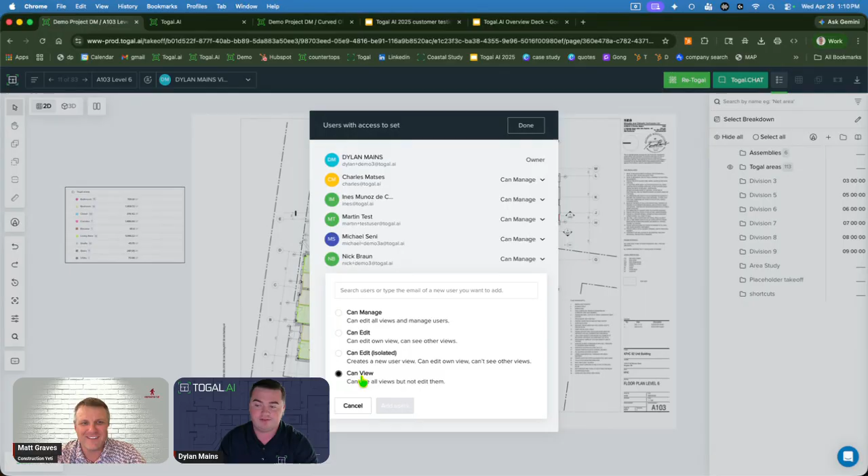Get your PM to look at it but not screw things up, exactly. You can see a room dimension and stuff. But on the pre-con team, you can track who's doing what, like I did the flooring, Michael did the walls, Nick did the counts. We can track who did what, combine it all together, and export as a team.

But let's show some AI stuff, if you get the whole cloud-based part.

So we're going to create a project here. The other goal of Togal, by the way, is not only to be the fastest takeoff tool in the world, but also the easiest to use, which is also a big deal. There's a very clean interface here with very few buttons. You want to make a new project, you click the new project button. You want to upload a plan, you click upload. There's only like 3 buttons to pick from. These other tools have hundreds of buttons.

So give me 1 sec here, I'm going to load up a huge file. We've got 800 megabytes here, it's a big school project, and these plans are unnamed, so we already know what's about to happen here.

With Bluebeam, I'm sure you've used it, right? So naming the plan, you draw the box over and over again, but some PDFs aren't vectorized, so it just doesn't work, or it still takes time just to draw those boxes. A lot of takeoff tools out there, you still got to name your plans manually one by one, even type it in keystroke by keystroke. You say you don't name plans in Bluebeam because it's a pain, right, you just play Where's Waldo.

There's lots of Where's Waldo in this process. So this is the first AI feature. With Togal, we really have AI every step of the way.

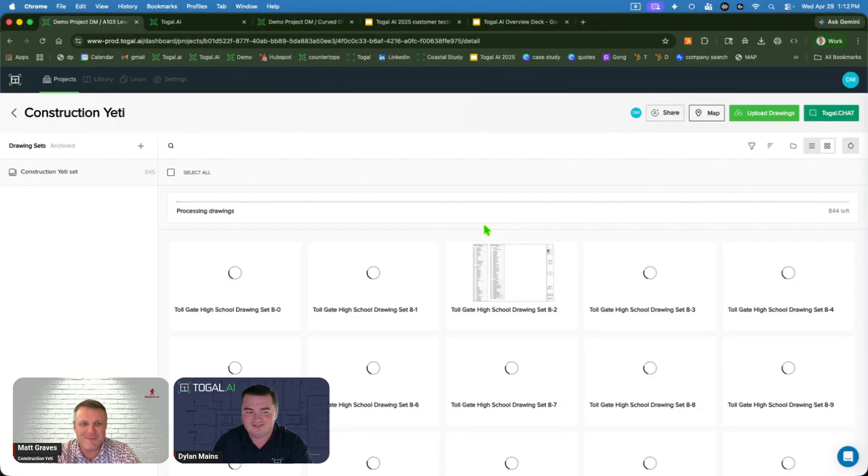This takes about a minute for 845 pages. How long would that take, Matt, in Bluebeam? Honestly, you can open up Bluebeam real quick, but even as you're scrolling, if it's a big file, it'll take a minute just to load it, and it's not even in and out. Me not being an estimator, how long does this take? Maybe we can ask the audience how long this takes in any of the other takeoff tools.

You see it's kind of happening live before our eyes here. These names, I'm not doing anything, by the way. Hands off the keyboard, it's just doing it for me. It's great, these plans are getting named.

Feel free to comment how long that would take in your current tool. But here's the other advantage of being cloud-based. I'm going to let this load in the background, keep it rolling here. I do know it takes way longer to upload to Google Drive. I've done that before.

Next up is this thing called Togal Chat. You don't just dive in and start measuring your walls, you first want to understand what this job entails. As a PM, Matt, I bet you'll like this feature, you can basically talk to your project with Togal. The biggest difference versus Claude or normal ChatGPT is this thing's only able to access your project, it's not connected to the internet. It also always has to provide a hyperlink for where it found the information, so you're not just blindly trusting it.

Here I said, summarize this job for a painting contractor. It's pointing out that all the exposed ceilings, piping, wiring, conduit, everything's getting painted PT6 across this project on those exposed ceilings, and I can go to that page and verify that. You can also just click the link, obviously.

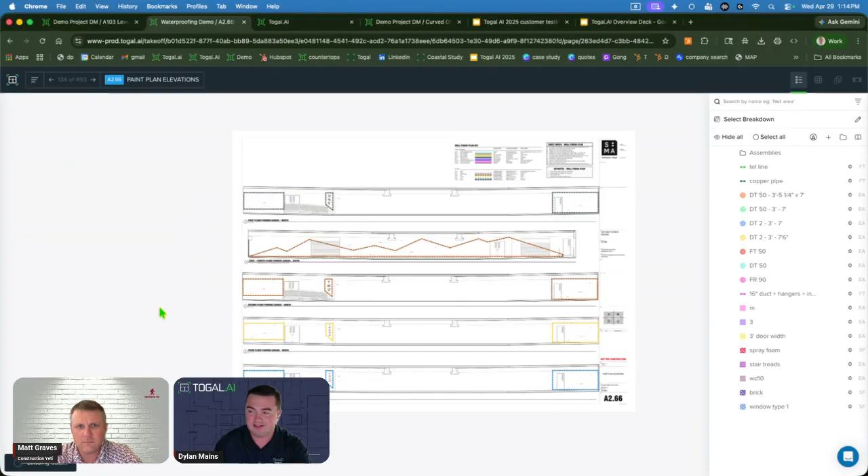But here's something else cool, we've got Control F, this is mind-blowing. A lot of takeoff tools don't have Control F. We do. I know Bluebeam does too, but a lot of people have Bluebeam and something else pulled up. There we go, all the exposed ceilings get painted, pretty easy note to miss. That's the only spot out of like 500 sheets that mentions that. As a PM, if your pre-con team forgot to include that in their bid, you're not going to be so happy.

Lots of cool use cases for this though. You can have it write RFIs for you and find conflicts in your drawings. It can create RFPs, scopes of work, etc. You just ask it.

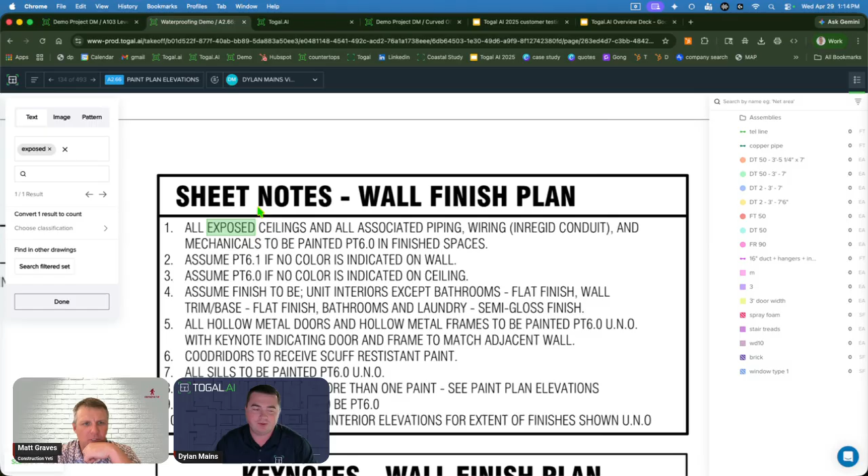We'll go back here, we probably almost missed it by now. There's 2 pages left. It's named, I didn't have to do anything. Every drawing is named and scaled that quick. Absurd.

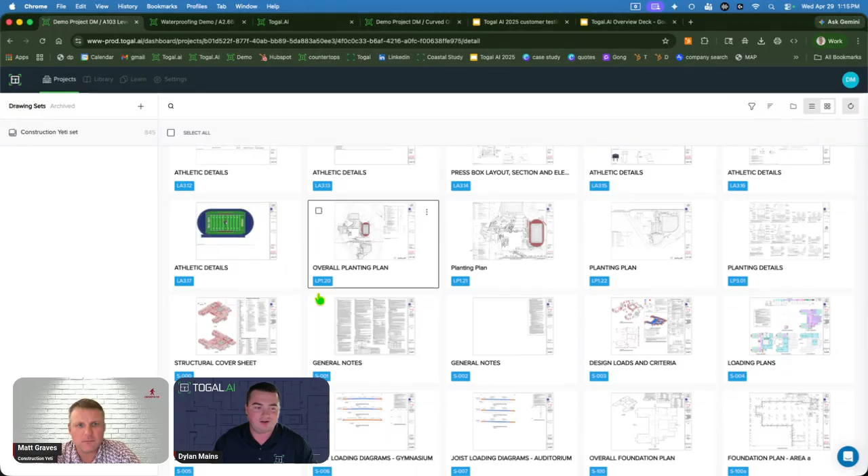On these demos, a lot of times I'll say that this entire call, that task might not have got done in your current takeoff tool, and you're going to see we're about to get a lot of stuff done on the takeoff side of things.

I always start with this crazy curve building. Maybe I'll start, I see in the chat somebody asked about civil, so let's actually start with that. Give the people what they want. Justin asked, can I do civil plans? Let's do it. How about a plan like this, Justin?

I'm going to start with the manual tool. I know this is kind of boring, but a lot of other AI takeoff tools, here's where they fall short, they don't have great manual takeoff tools. Over here on the right side, I can create a classification from scratch: areas, linear feet, counts, you get the idea. We'll say concrete pavement here. We want the volume, we want the area, we want the perimeter for our form boards or something.

Maybe a custom formula, that's something the on-screen takeoff can't do. I can do equals my area in square foot. I'm not really sure what the formula for rebar is, but we're just going to say divided by 25 and call that rebar.

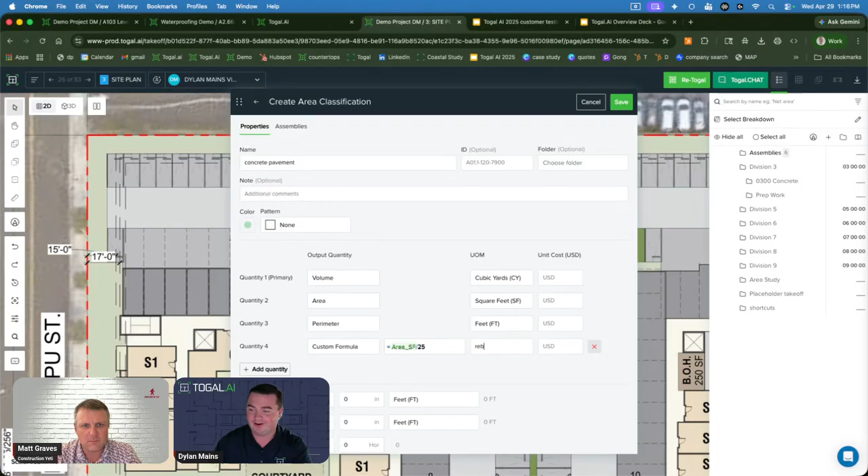So it's 6 inches thick. We could come in here and do a manual takeoff if you wanted to. And you best believe we've got an arc tool.

Press A for arc. All these shortcuts, by the way, are all on the left side of the keyboard, so it's pretty ergonomical. A for arc, R for rectangle, C for circle. Also pretty easy to memorize and learn this thing.

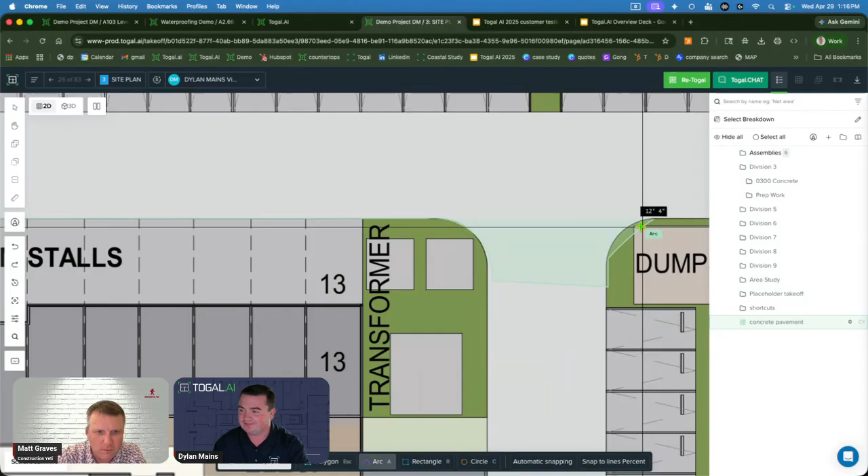So you could have the hotkeys, or it pops up there at the bottom. I don't know if people can see that because I've got... oh, it might be in the way. There you go, let's get our faces out.

But we can do a manual takeoff, and even our manual tools are pretty slick. Like I can press S for split, and I can split through this here. I can change this over to like a sidewalk or something, I know that's like light duty pavement probably. We can cut from an edge—most tools won't let you cut from an edge.

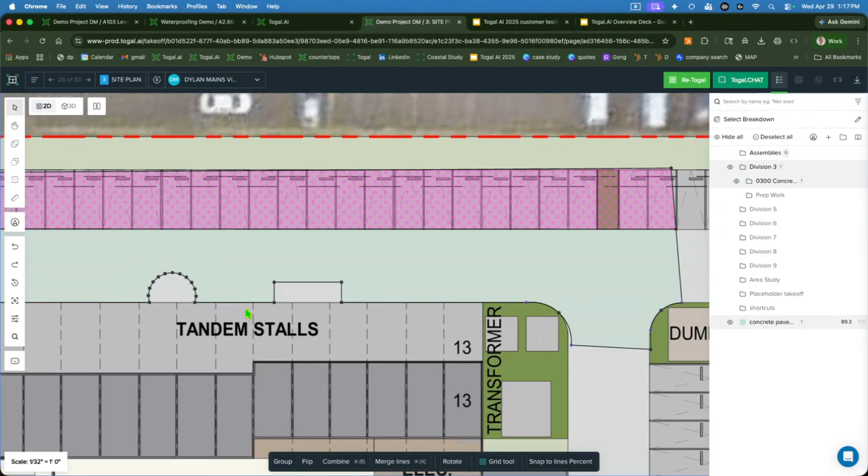This plan's kind of hard to see. I'll just show the AI on this one, and show the manual stuff on a different plan. But in Togal, we just click this little magnifying glass here, click on pattern search. You just highlight a portion of this parking lot, and it happens pretty quick—hopefully nobody blinked. It just measures that whole plan, all that pavement for me. All we got to do is label it.

Oh, it looked for that pattern and everything with that pattern and just automatically did it? Yeah, let me make this color a little more bold so it's more obvious here. I'm going to make it solid.

That's like I have a funny story on this whole solid option actually. We were out at Lee Kennedy's office doing trainings with them. They just rolled out Togal for their pre-con team, and they had a few estimators who were colorblind. I made a phone call to our product team while we were there at their office, and we had this feature added that same day.

It's also cool, like a modern takeoff tool—we're constantly updating it. But that solid makes it a lot easier on the eyes to spot things. So if you had like a flooring hatch or something like that, it could find everywhere that the same flooring hatch is.

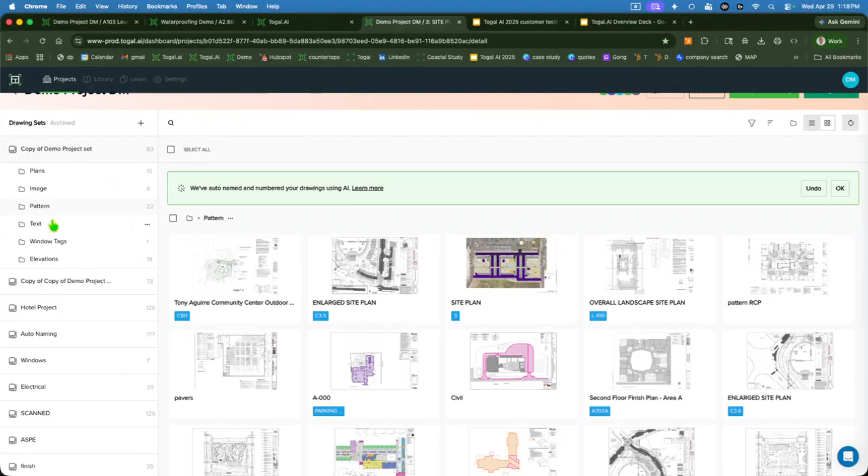You just highlight a pattern of it and it finds it. And sometimes you don't get a pattern, right, like on a parking lot like this.

I love this example too because it also makes mistakes, right? So I click that magnifying glass again over here—the shortcut's Control F to activate that, by the way. You highlight a little portion of this parking lot. On this one it kind of falls short a little bit, where it makes a couple mistakes here and here because there's not a good pattern. It just kind of fills it in.

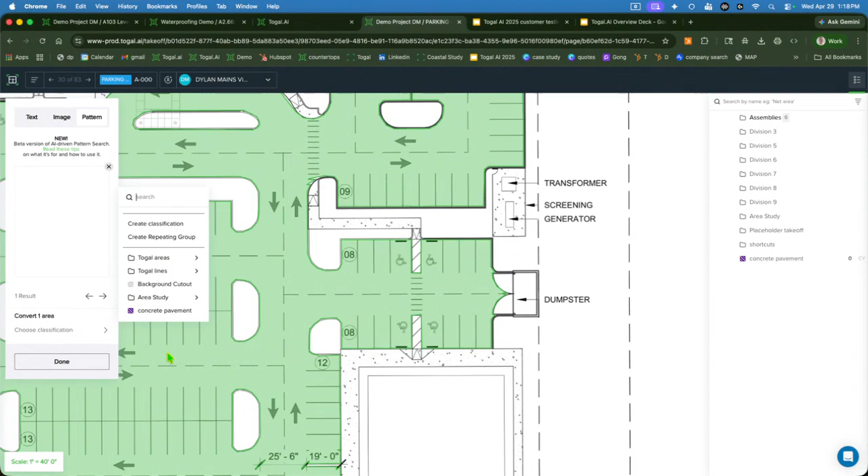So I'm going to label this one concrete pavement here again. In a lot of tools, you come in here and start dragging these points around, and that's going to take a long time. In Togal, we have a merge tool—over here on the left side, I click that button and just press M for merge and R for rectangle. I can just merge this in.

Pretty cool. Oh, dang, dude, look at that, yeah.

So it's super easy to clean up the AI's mistakes too. That's kind of the idea—the AI is going to make mistakes, that's totally okay. It's how fast can I fix it, you know? This solid's kind of throwing me off, honestly, I'm going to switch it back to not solid.

But yeah, lots of stuff for civil site work. We can do a demo on your plans, obviously, too—feel free to send over examples of that, book a demo with us.

But how about these crazy floor plans? This is where we really pull ahead in the race. So I'm going to start with the manual stuff again—I've got my Div 9 paint here.

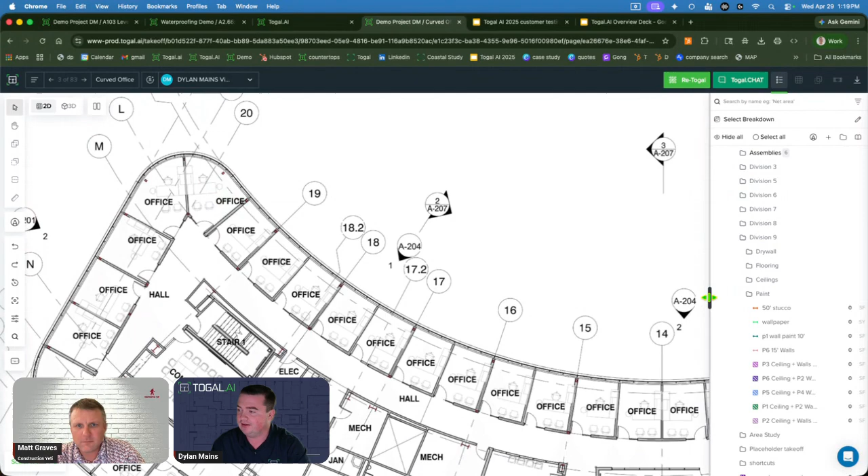And by the way, as part of the onboarding, you send us over your existing database from OST, Bluebeam, etc. Bluebeam calls it your toolbox, OST calls it a style set. But send us over your existing database—we'll build that inside Togal for you as part of the onboarding.

That's cool. With your cost codes, your folder structures, all that good stuff.

I'm going to press A for arc here and draw some P1 paint. I can split that here, just press S for split, drag a line through it, split it. Even what I did there with those weird shapes on screen, I'm not going to count the clicks, that's a lot of clicks to make that shape. You can't do an arc with other tools. It seems simple, but other tools can't do that, which is kind of wild. You have to click every little point there.

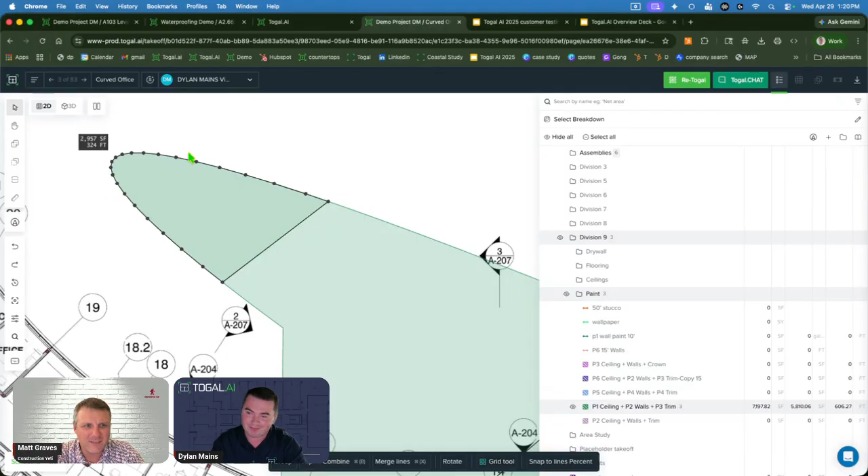I can change this to a different type of paint, just right click and change it. That's also a unique feature. A lot of tools, you can't change it, you have to erase it and redo it, which is kind of wild.

We can cut from an edge, we can cut in the middle. And I'm cutting a circle because most tools can't do a circle either. It's just kind of funny, you have to click all those points.

I'll right click and fill it in with like tray ceiling or something. Get the ceiling, get the bulkhead, get the crown molding. Boom, and we can get a 3D visual.

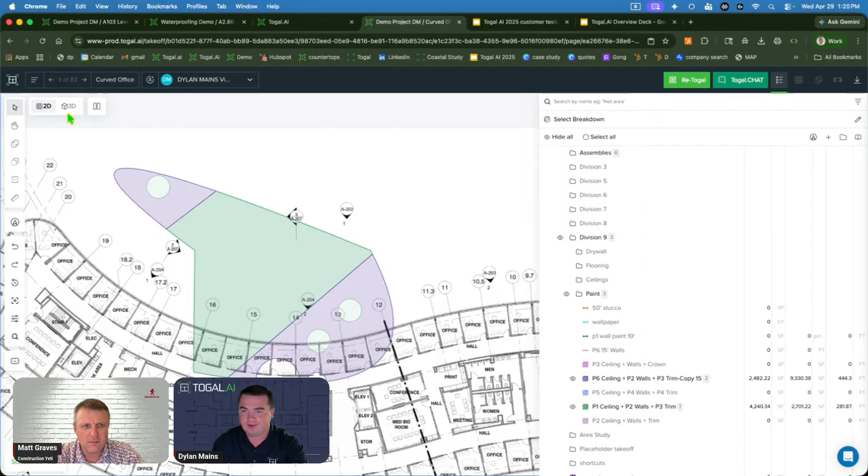Here's the grand finale here. Hopefully everyone's sitting down, we got people falling out of their chairs when they see this feature. Look at that, Matt, come on now. We can adjust it in 3D.

So, dude, pretty wild. Could you do all the walls? Like essentially do all the walls? Let's do it. Yeah.

So just thinking too, I'm an owner's rep on the owner's rep side, and a lot of owners aren't used to looking at two-dimensional plans. They can't visualize what it looks like. So being able to quickly show a 3D.

So a lot just happened. I clicked that Togal button and I clicked go, by the way, that's all I did on my side. It was literally one click. But again, you blinked, you missed it. Sorry guys, everything's fast in Togal, we can't help it. But with that one click, it just measured all these different things.

And like you mentioned walls, we'll jump right to that. Wait, say it again, you didn't have that preloaded? You just did that? No, yeah, so I clicked that Togal button and I click go, and it's going to measure all these different things.

You can customize it too, but for the demo I'd always just go ahead and run everything. We actually just had a new update yesterday where we now recognize the wall tags too, so that's a fun fact. Feel free to send us over a project that has your wall tags on it, it can pick them up.

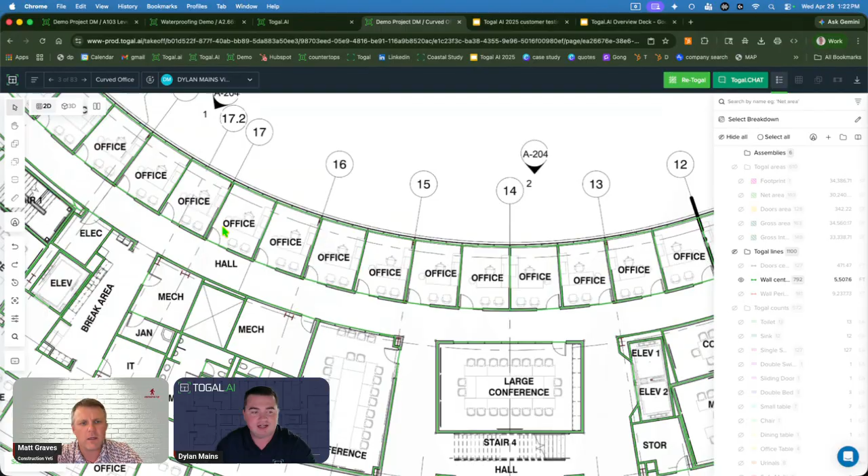So how does that work? So it picks it up from a detail, and then it'll pick them up on all the sheets, or it reads the wall tags on the plan and just assigns them all based on those tags. Yep, I see what you're saying.

Pretty wild. But yeah, so it gives you all these different measurements, and you can use these measurements to do a real takeoff. So to really simplify this, people always ask what does the AI in Togal do? What the AI does, like even on that parking lot you kind of saw it, it saves you a lot of clicks. Rather than you sitting here clicking one, two, three, four, you get the idea. This corridor here is maybe a few hundred clicks.

And with Togal, we got to figure out what that is, you still have to learn the job basically, right? So we got to label that carpet maybe, and it's done, versus having to sit here and click and click and click. We save a lot of that clicking part, and that's why our price is so cheap, because we realize there's still a lot of work to do. You still got to label things, but that clicking part, the AI is really, really good at.

So that's the approach we take versus like full AI, just click a button and it does it all for you. There's still human involvement here, and we think that's the right way to go, because maybe it misses something, or maybe there's a sidewalk that's not on the plan at all, and we want to draw that in. We can still do that, like the plan doesn't show a sidewalk there, but we can just add it in if we wanted to.

But yeah, so it measures all these different things, and we can use those to do a real takeoff. Oh, I called that carpet a second ago, let me bring that back.

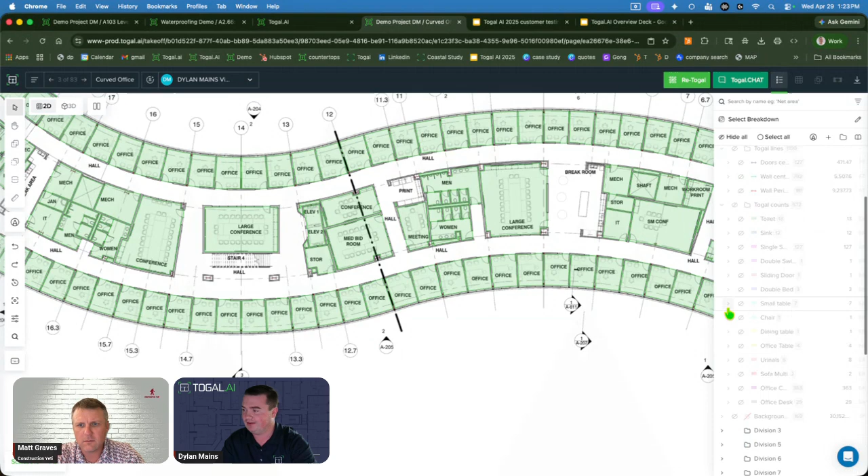Where did my carpet go? Let me refresh this real quick. I meant to change that back to net area. I'm going to do a full paint takeoff as an example here.

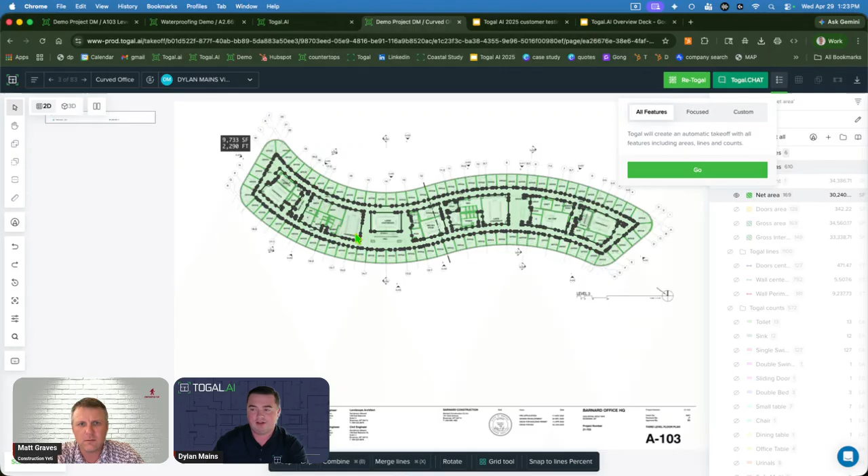Let's just Re-Togal it, it's fast enough. Re-Togal will give you a fresh layer. The purpose of Re-Togal is, like this net area, you can use these same polygons for flooring, but it's also the same measurement for the ceiling. So one way we'll do this, we'll call that carpet, then I'll Re-Togal it to get a fresh layer, and we'll call that maybe gyp ceiling or something.

I'm just going to auto classify these here. It's going to separate my room types automatically. And then from here, we can just fly through a takeoff. On this right side, we're not painting the shaft walls, we're not painting the openings or the elevators. Let's say all these offices here are going to get P1 paint, so I'm just labeling those.

But did that classification happen based on the text on the drawing, or what? Exactly, yeah, it's reading the text on the drawing, that's the first thing it looks for. If there's no text, it kind of makes a guess. And it's also looking at objects in the room - one of the things it does is count everything, like your plumbing fixtures. So it knows if there's a toilet in there, that's going to be a bathroom, for example.

Oh, dang, and it had that basically square with the X, so it knew that was a shaft of some sort. Exactly, yeah.

Okay, but I kind of just flew through that, honestly. I might need to do that again a little bit slower, because that was probably too fast for everyone to follow. But that quick, I just did a full paint takeoff - ceiling, walls, and trim - and got a number of gallons of paint as well. And literally, you sneeze and you're like, what just happened?

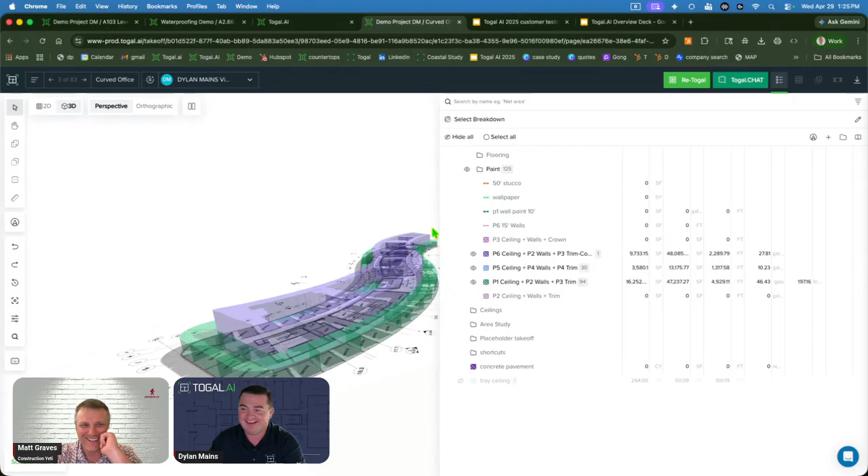It's wild. I'll do the walls here. You're not on the training team, are you? You go way too fast. No, we got a separate team that goes a lot slower for that. They got me, yeah, they don't let me train people. I'm not sure why.

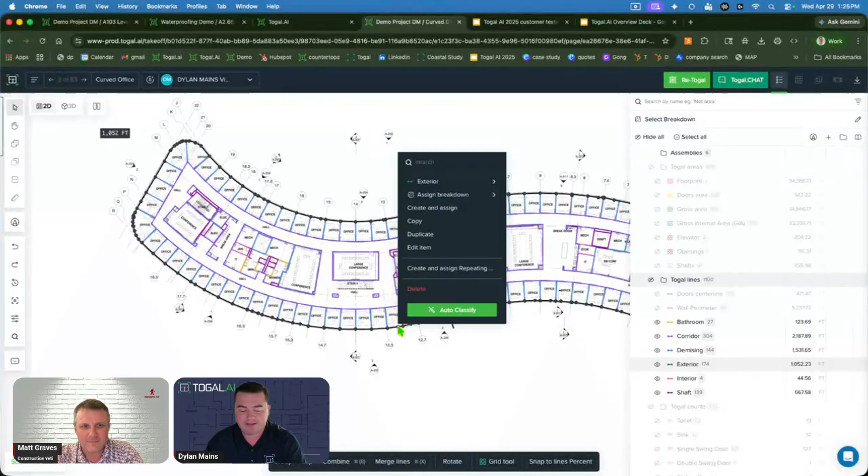Go back to the 3D, or what are we doing? So I'll do all the walls here. You mentioned the walls, so I'm gonna auto classify the walls. On this job, there's no wall tags, so it's just looking at where the wall is at relative to other walls and making a guess. It separates out your exterior walls - we'll go ahead and make those 2x6 maybe. And then I'm going to label all the interior walls as 2x4 just to keep it simple. That quick, we've got all my 2x4 interior, 2x6 exterior done.

There's a 3D of it, like crazy. Dude, let's see the walls in 3D, Kelsey says.

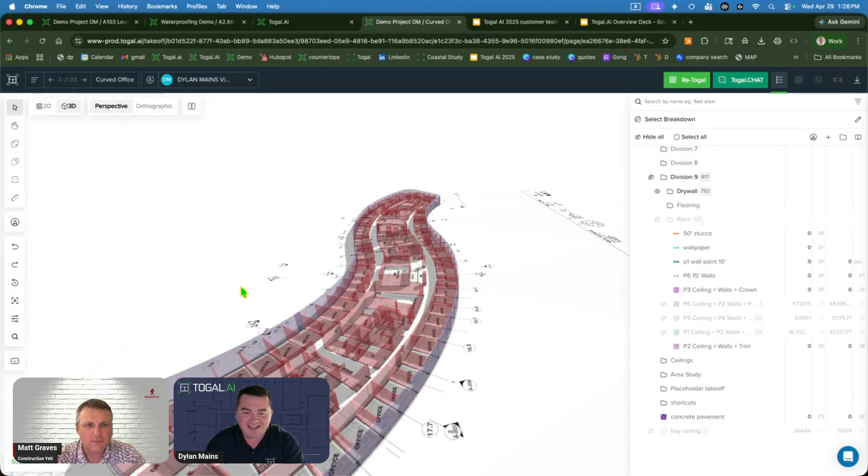There we go. But on the walls topic, I always point out, let's assume worst case scenario that every single wall is a different wall type. Even in that case, Togal is going to save you 50% of your clicks, rather than clicking on every wall, it's just going to be one click and labeling it. So worst case scenario, it's only 50% quicker. But usually that auto classify gets you a lot farther than 50%, because it's grouping a lot of them together - your corridor walls are usually the same wall type, your shaft walls are usually the same wall type, etc.

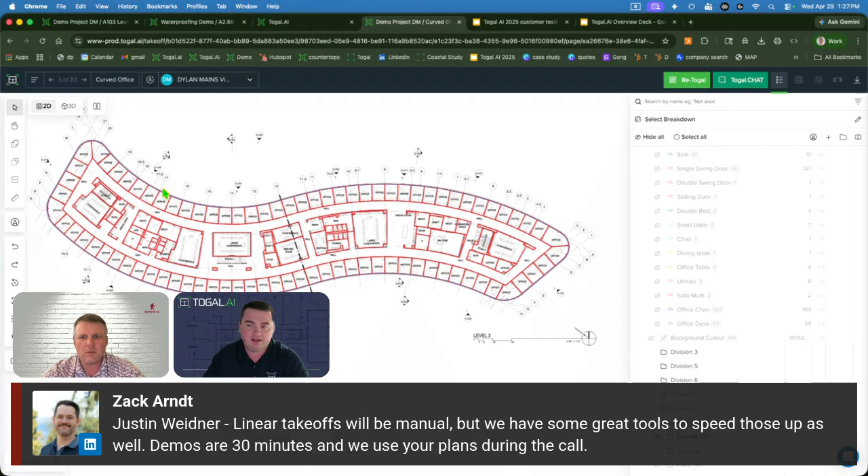So you can still do takeoffs, more manual like you would use your other tools for. Exactly, and even for a manual takeoff, I still prefer to use Togal for those different reasons. The shortcuts are nice, we've got the Togal chat to ask questions about site utilities, the fact that it names my plans for me, and the fact that I can work with my team and log in from anywhere. So I'd still prefer Togal as a manual takeoff tool too, which is pretty cool.

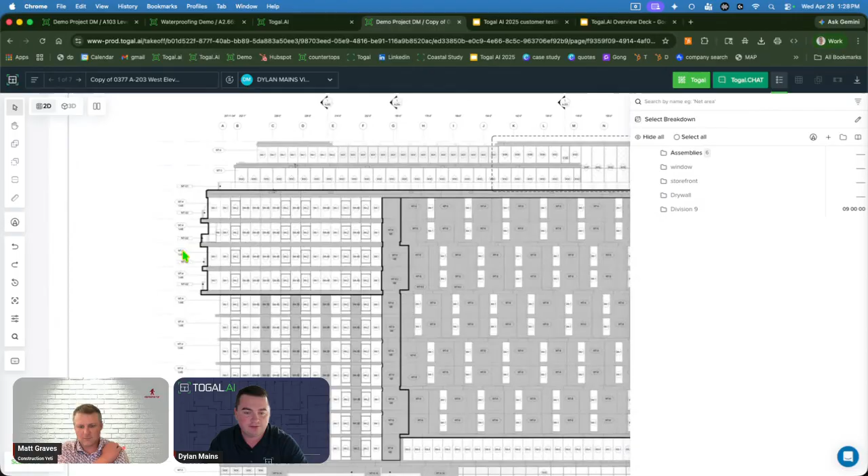Let's show some other examples here and keep the questions coming, guys. But let's go ahead and count some things. So say we got to count windows, or count spread footings in the civil world or concrete world. There's lots of counting in takeoff, and playing Where's Waldo.

In other tools, you come in here and create your count condition. We'll say W4.1 window in this case - spelled it wrong. We can say we want the area of that window, the perimeter of that window, put in our dimensions here. With other takeoff tools, you're going to have to click these one by one, obviously. It's going to take a long time.

In Togal, we've even got some fancy manual stuff for this too. We can do smart copy paste, for example - Control C, Control Shift V. There's a lot of shortcuts that we'll teach you as part of the training, but we've got an even faster way than having to count these manually.

We just click this magnifying glass here. If you do Control C, Control V, copy paste, and you end up with a whole bunch of rectangles in the wrong spot, can you then drag those rectangles into the right spot? Yeah, exactly, but I'll show you a faster way - I don't even have to click them one by one or line it up at all. We've got an AI tool for this.

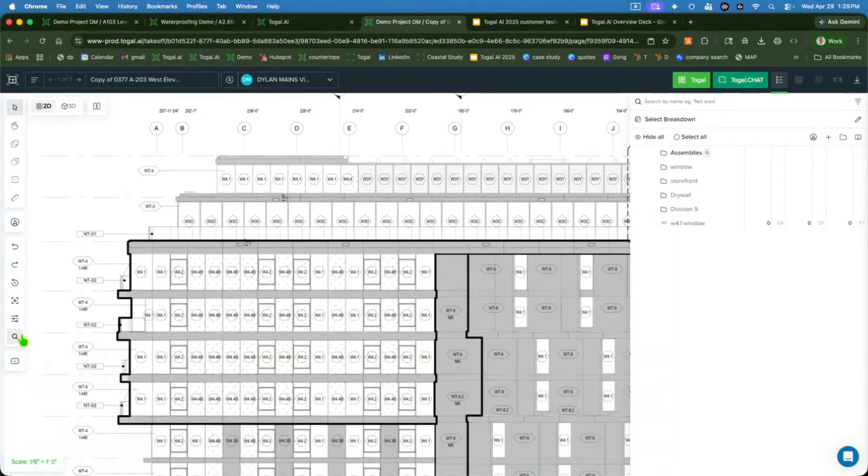So I just search those tags here, it's going to find all of them. See that quick? They all just lit up green. And then I can search across all the pages at once - that's why this feature is so cool, you can do the whole project at once. It just found 1,300 matches, and I'm now just going to label those as W4.1 windows.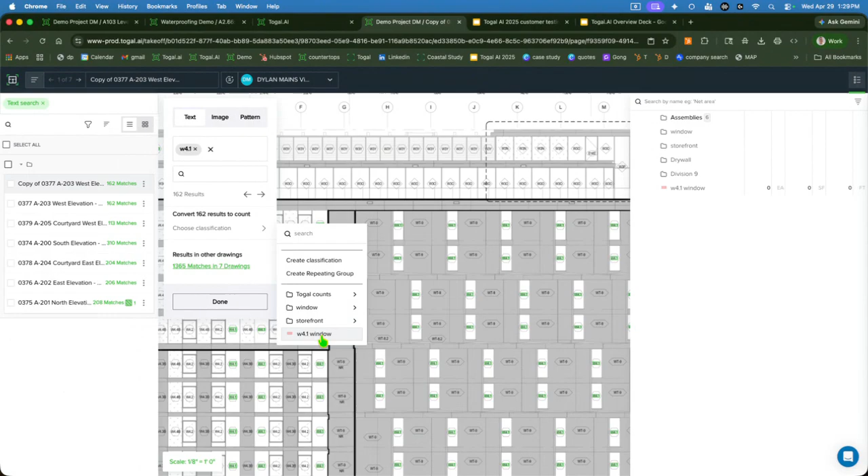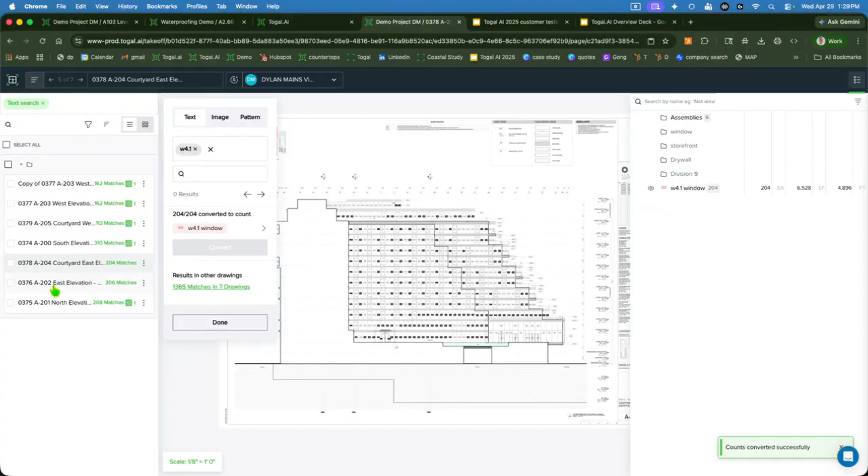You've got to click convert, so you have to go page by page like this and click that convert button. When I click convert, it's counting them - see over here it says 0, I click convert, it locks it in. But you have to go page by page and convert it because it will find false positives potentially on a cover sheet or a detail sheet or a schedule. Obviously you don't want to count those. But that quick, we just counted almost 1,400 windows across this whole project here.

And I can highlight these ones past the match line and manually erase those. That was 2 clicks - still faster than 202 clicks though, in our competing softwares, you know.

I wrote a news article about some people saying, well, AI is not that great because you still have to go edit it and fix it. I'm like, okay, right, but I basically wrote a whole article talking about how AI is more like an intern, right - it's a really smart, powerful intern. You've got to give it good direction, and then you've got to actually check its work. You can't just ship it.

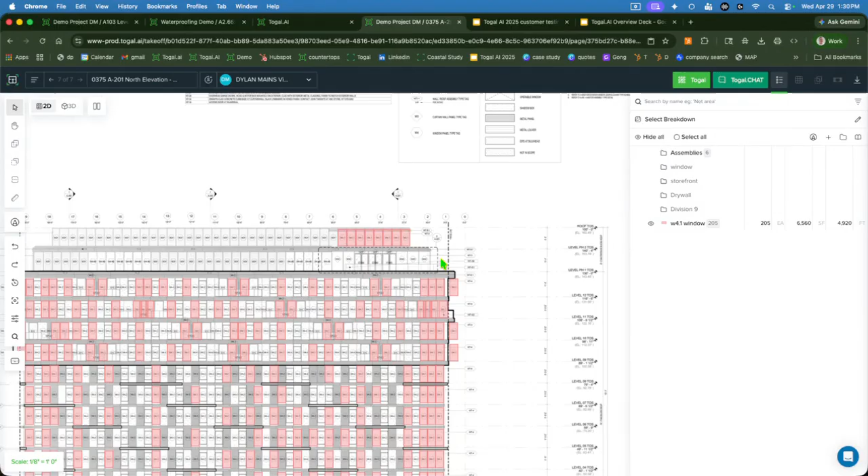We probably could train the AI with enough training to not get that window past the match line, but there's other lower hanging fruit, you know what I mean - a human can do that really quick. You still want to check stuff for sure. So you've got to erase those ones past the match line still.

And people always say too, like doing takeoff is how they learn the job, and we believe in that here at Togal too - doing takeoff is how you learn the job. So we want the human to be involved every step of the way, and that's kind of how everything here is built. You still have to check it. Checking works faster than doing it overall.

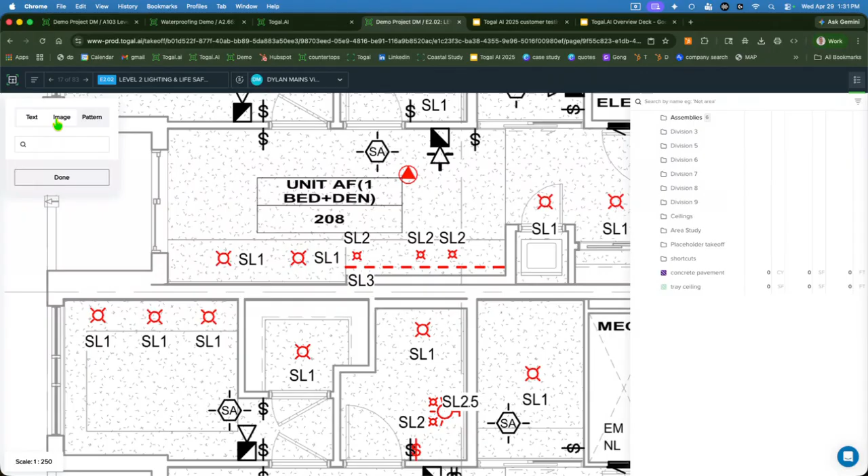Here's another cool example of symbol search. You've got these crazy symbols with a speckled background, same symbol just different sizes. That's why this exact plan is really hard, and we've tested it on all the other major takeoff tools out there. In Togal, we just highlight one of these symbols, and it takes into account all the background noise and deals with that automatically. It accounts for the size of the symbol, it also deals with all degrees of rotation, and just goes and counts them. It just works.

Jeez, even with that text over it. Exactly, yeah, it's pretty wild, right? And it knows its size is different. Oh yeah, because it didn't do the SL2s. Exactly.

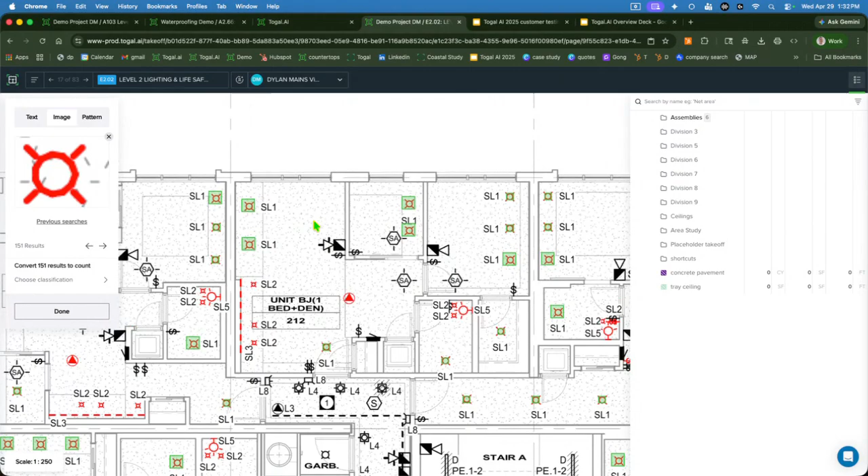So this is a tough one, and you still want to go through and check it, right? There's a chance it could have missed one, or maybe one's not drawn in at all. Obviously AI can't get that. So you definitely still want to check it, but it's way faster than clicking 150 times over and over again. Maybe now you're clicking once or twice. But in this case, it got 100% of them.

So you can trust it. You label it SL1 and click convert. There we go. How long would that take to click if you were clicking? Yeah, the fastest clicker in the world, plus playing Where's Waldo too, in addition to clicking. Waldo can't hide here.

Maybe more of a normal plan here, or how about a really bad plan? Let's jump to that, like a hand-drawn napkin sketch. People always ask, what if I get a really early stage, bad plan? Will the AI still work?

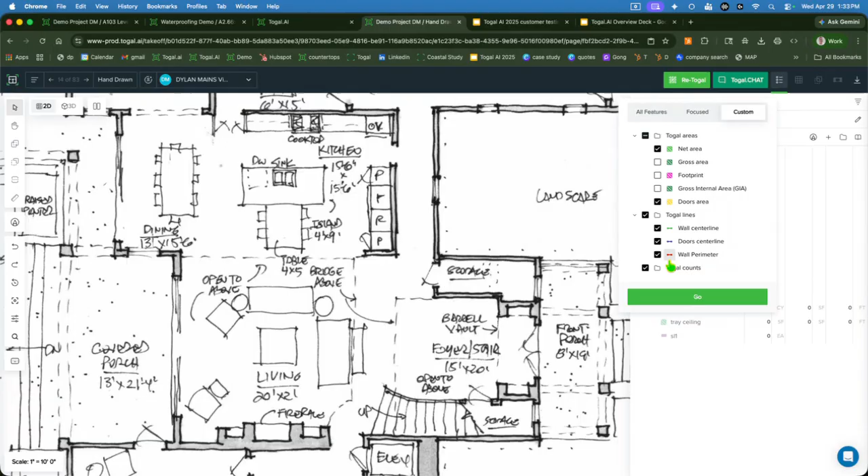Well, first of all, our text extraction—I click that magnifying glass again. A lot of things in Togal rely on text, and we have our own OCR we built in-house here, and it's really powerful. So even a handwritten note like that, it still reads it, which is pretty wild. Even Bluebeam, you can't read that. With Togal, we click that Togal button, click go, and just like that, it measures it.

So it counts your doors, your plumbing fixtures—I kind of skipped over this before—it also measures your wall perimeters, which is the perimeter of all the rooms. This is kind of a weird plan to show these on because it's not the best plan in the world, but the bottom line is it still worked, even on this kind of plan.

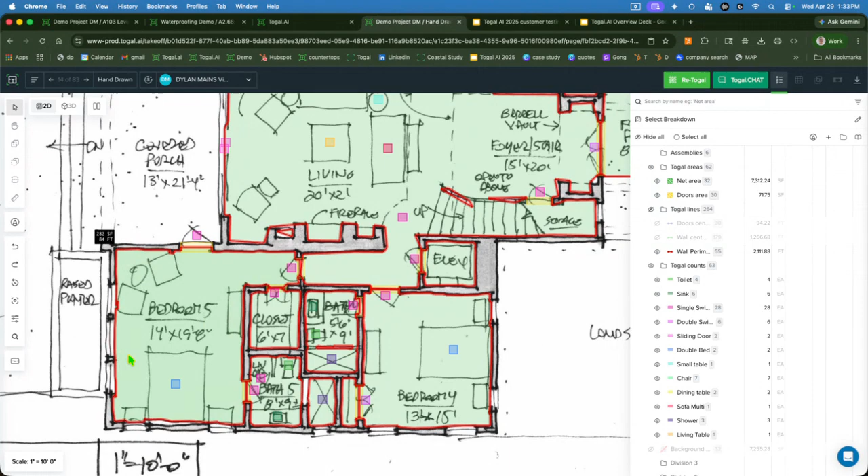Tucker has a good question there: if there's multiple scales on one sheet. That's a good question, Tucker.

When there's multiple scales, like I mentioned before, Togal does auto-scale your drawings. Let me go to this drawing and show you what I mean. You'll see this little pop-up on every sheet that says we've auto-detected the scale. We use a combination of text recognition and door width to assess the scale. We only auto-scale if we're highly confident. You should still check it and make sure it's accurate prior to doing your takeoff, obviously. But on drawings with more than one scale, it just leaves those ones blank, and then you have to scale it manually.

And you can duplicate the sheet. You just click on this little pop-out drawer here, that's where you can see all your drawings in a list view or grid view, and you can just click those three dots and click duplicate there. Good question.

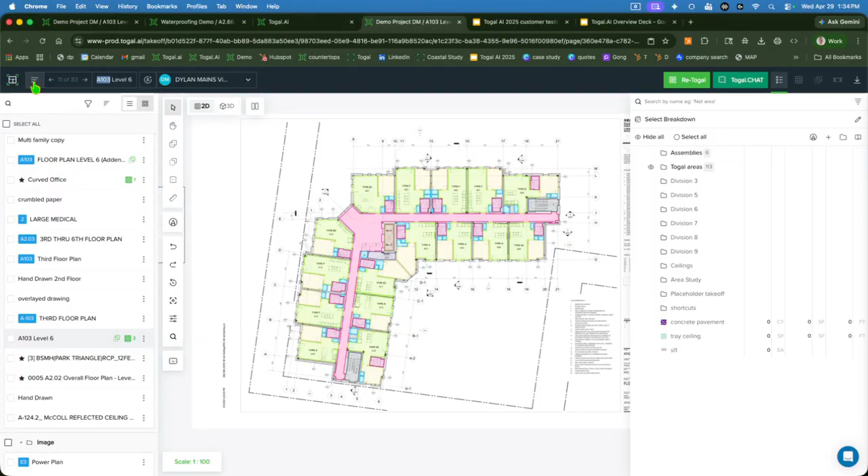I'm just going to show this hotel plan here. I think it's a more realistic one to look at versus that crazy curved building. But with all plans, you click that Togal button and it's going to measure it. We've got the net area, which is like your flooring or ceiling area, not including the studs. Your gross area includes the exterior walls plus all the interior walls. Your gross internal is not including the exterior walls. So we've got it measured all these different ways depending on what your use case is.

All at once, crazy—lots and lots of clicks. Yeah, this net area here, imagine clicking that corridor out, that is a lot of clicks. And it's done it on the money perfectly. People always ask about accuracy too.

That's a common question, and the AI is actually slightly more accurate than a human, because most humans don't go to the half mark of the doors perfectly every time. The AI obviously does.

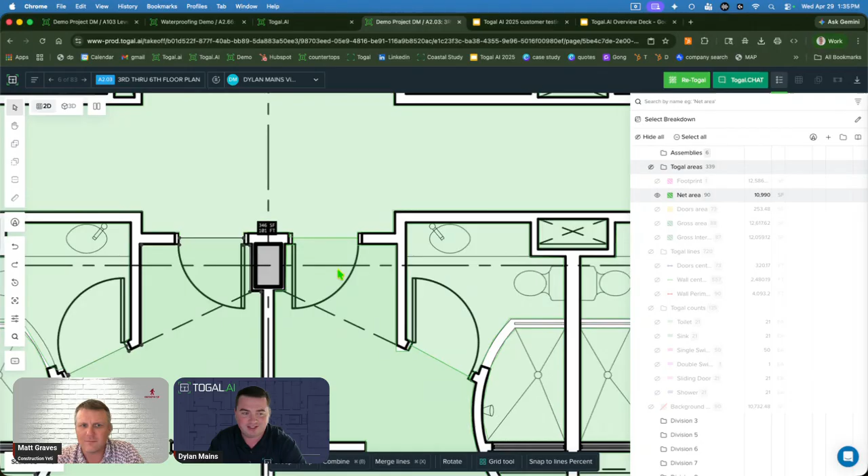So I've clicked and clicked and clicked on Bluebeam, and about halfway through the drawing, your accuracy goes way down because you just want to get done.

True, yeah. And with this thing, I'm still fresh. Think how much takeoff we've done so far. I know, it's like I'm blazing around here. We did that curved office building paint takeoff. We named 1,000 sheets, we wrote a paint scope of work so far.

We did that curved office building, the whole paint takeoff on that thing. We did 2 parking lots. We counted 1,000 windows. We're still fresh though, got plenty of time left. Did all that in like 30 minutes.

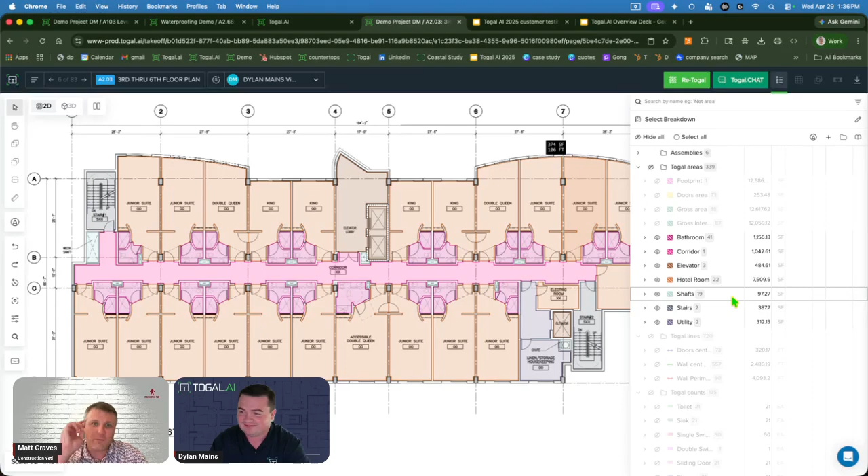Third, right? Yeah, every one of those tasks one by one would take this entire call with other takeoff tools. Oh yeah, and that's, I mean, again, when I'm clicking, I'm not even getting that close enough to the corner.

There's lots of shortcuts, obviously that's going to take some time to learn. But overall there's only 19 buttons in the whole site, so it's also really, really easy to learn this thing. There's just not that many buttons to learn.

There's a couple little nuances, like dragging right versus dragging left. That takes some time to get used to. But I've actually heard Bluebeam works the same way - if you drag this way, it grabs whatever your box is touching. So in this case, it'll grab all those units there. Versus if I go this way, the gray selection box only grabs what's fully inside of it, so just those bathrooms, for example. But your first day or two using it, that's going to drive you nuts if you're not used to that functionality. Once you get used to it, it's great.

So okay, you've done your takeoff, you got it here in this sheet. Now can you export into Excel, or what do you do? I'll click back on this one here. So you've got a few options - you can export as a PDF with a legend, or you can download to Excel.

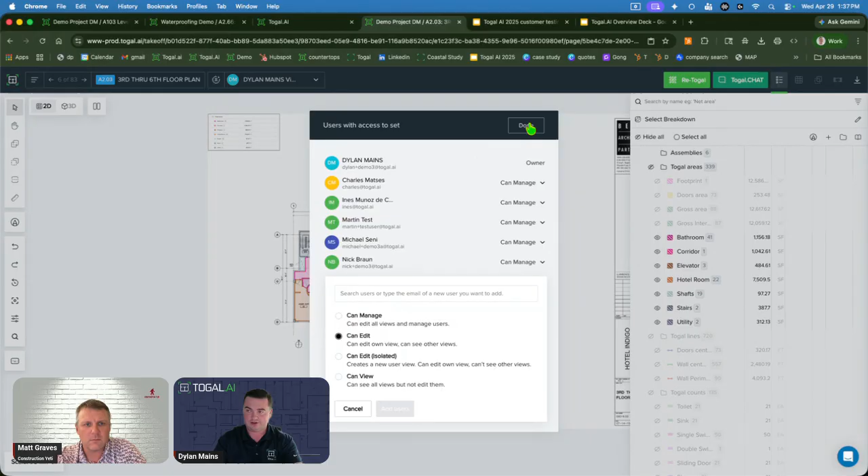I'll show you that. Something else though, because we're cloud-based, you've got a couple more options. You can invite somebody in as a viewer - it's kind of like sharing a Google Doc or something. You could also just copy this link and Teams it to your coworker. They can open it up on their phone and see what you're seeing. That's way faster than extracting as a PDF and uploading to Dropbox and all that.

Just copy the link. Oh, dang. So if you copy that link and send it to me, I can open it up and see this sheet, or see everything. So you're not in my Togal account, so I'd first have to invite you, right? And then I could copy the link and send it to you. But say we worked at the same company - in that case I would just copy the link, you'd open it right up. But that first time, you have to create your account basically.

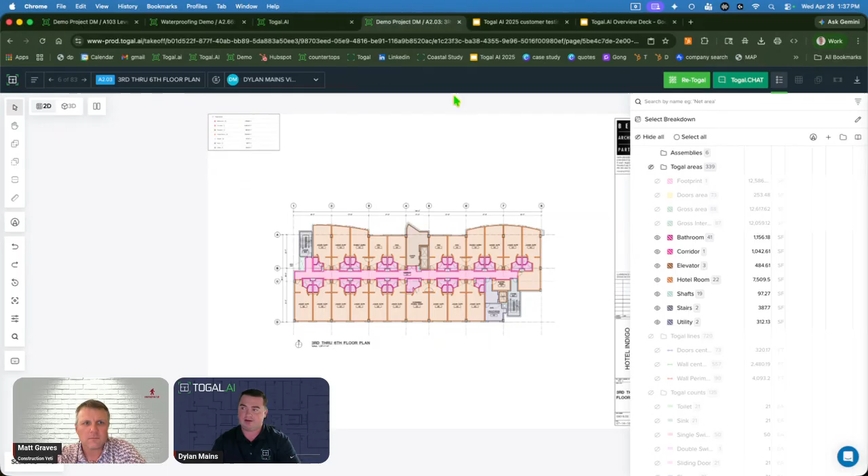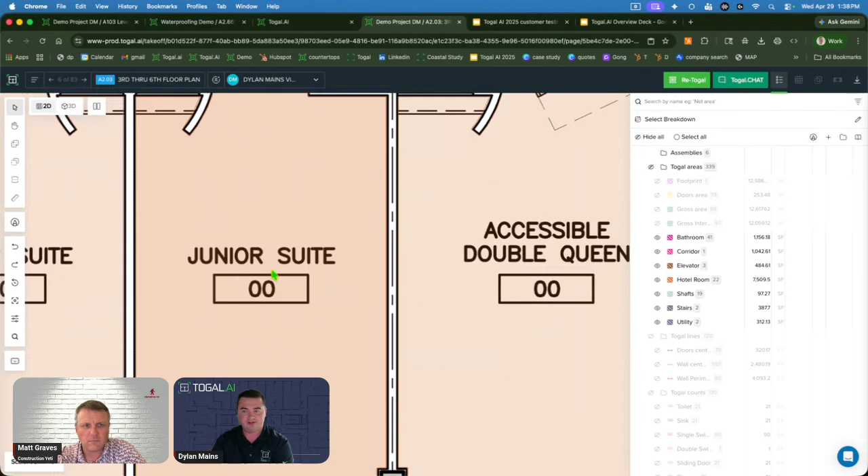Yeah, I got you. Here's the PDF export though. One nuance here is our PDF export actually does maintain the quality of the PDF. So a lot of tools out there convert to a TIFF file, so it makes the drawing all pixelated when you zoom in real far. And also in Bluebeam, you can't zoom in and out fast. With Togal, we've got the best of both worlds there - zoom in and out fast, plus high-res drawings.

And that applies to our PDF report too, so when you download the PDF, you're going to get that legend. You zoom in 500%, it's going to be crystal clear too - there's no pixelation still, which is great.

And then we've also got the Excel side of things here. Jump around a little bit. We've got a lot of flexibility here, and for those coming from Bluebeam especially, this is where we really save you a lot of time on this last step of the takeoff process. We really save time every step of the way, from uploading and naming your plans, to understanding your scopes of work with Togal Chat, doing the takeoff with all the AI takeoff tools. And this last step on the Excel side, you can spend hours trying to slice and dice your data.

You want it broken out per building, per floor, per phase, per trade, all these different ways. With Bluebeam, for some of those slices you might have to restart your takeoff completely to make that happen. With Togal, we've got all those tools built in, so you can download your data already clean. Just click the export up here.

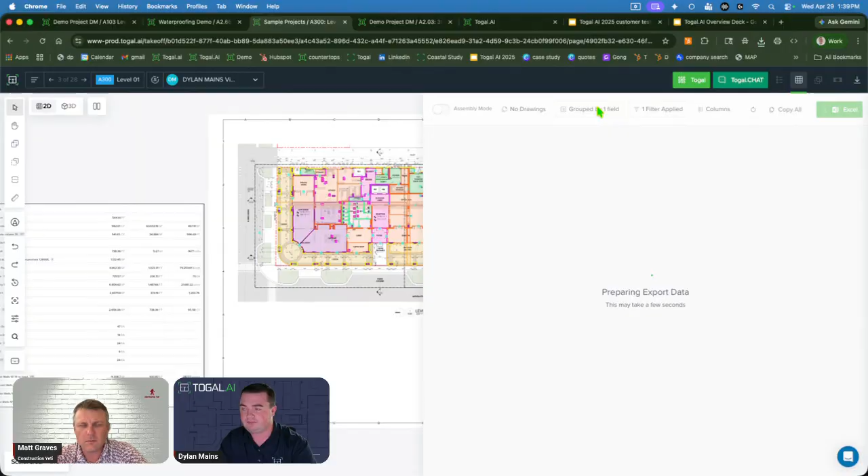By default you'll get a big list of all your quantities. I need to clear out my groupings and filters, but by default you get a big list of all your takeoffs across the whole project. Let me turn this ID column off too, and I can start slicing and dicing this.

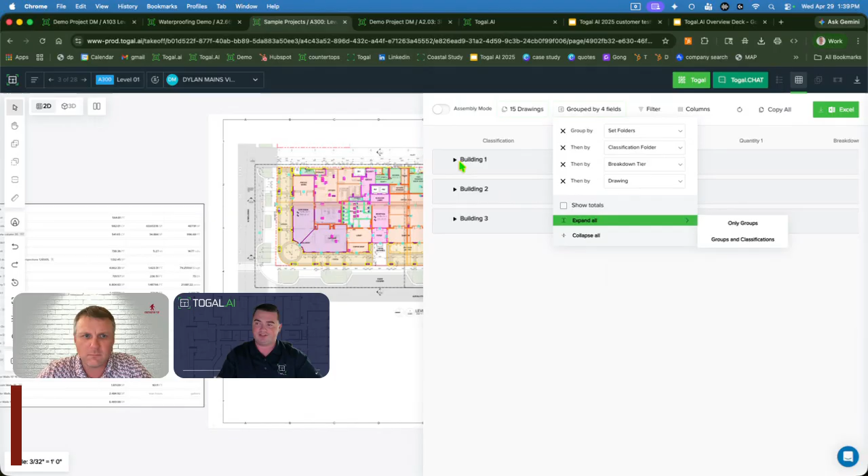I want to separate this out per building, for example. Then break it out per floor. Or, we'll do it per trade, then per phase, then per floor, as an example. That's just four clicks on my side. I've now got it broken out per building, let me collapse all this. But it's going to break it out however you want, essentially—per phase then per building first, or however you want to do it. It's just a click away.

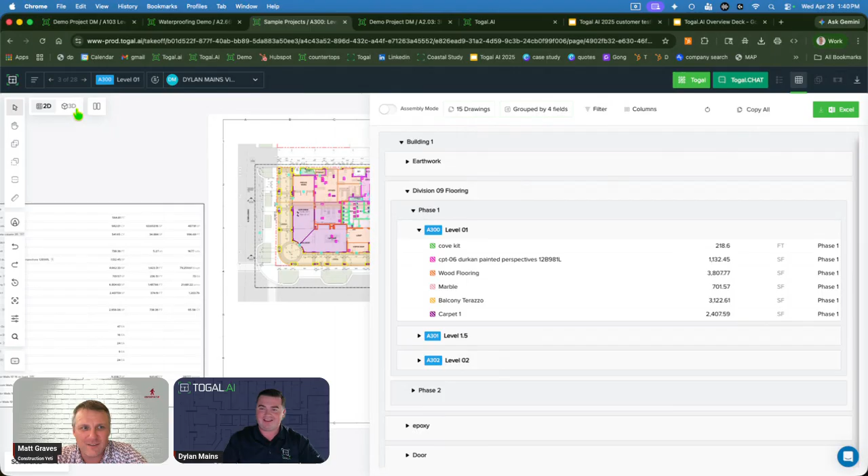It's cool though, how fast it moves. This thing moves as fast as you move, not the other way around, which is also a rarity. With other takeoff tools, your mouse is moving and it's trying to catch up with you. With this, that does not happen. You could be on a Chromebook and it's still this fast, which is wild.

I guess it's as fast as your internet is, huh? Well, we go to trade shows a lot, and I'll use my phone hotspot at a trade show and it works just fine. The only time you really notice how good your connection is is when you're uploading drawings. You kind of notice it there—that's all about your speeds on that side.

Yeah, there's your Excel report ready to go. You can also copy and paste right from here, but we basically have a pivot table built into the Excel report, so you can organize your data here and download it, versus having to go out to Excel and spend hours making your own pivot table.

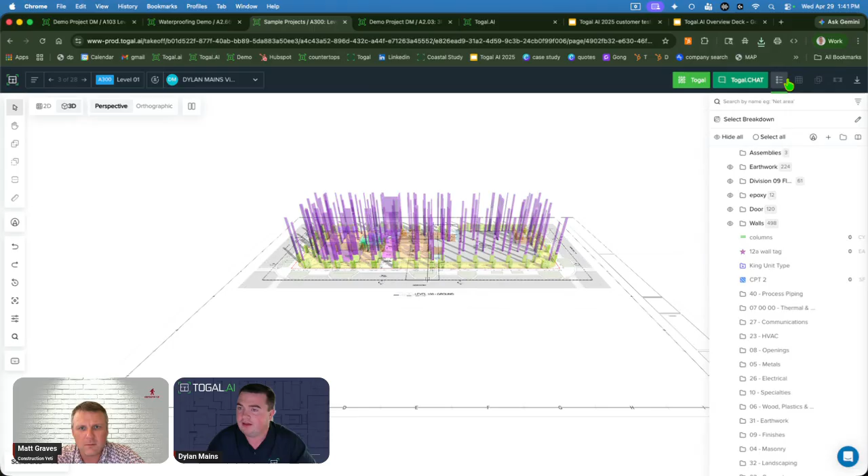The only other big feature we haven't covered is comparing revisions—there's actually quite a few we haven't shown, but that's a big one. Because we auto scale your drawings, when you go to compare them here in the top right, it actually auto aligns them for you. In a lot of other tools, you have to come in and manually line it up, and it makes everything red and blue.

You got to break out your 3D glasses. Talk about getting dizzy, Kelsey.

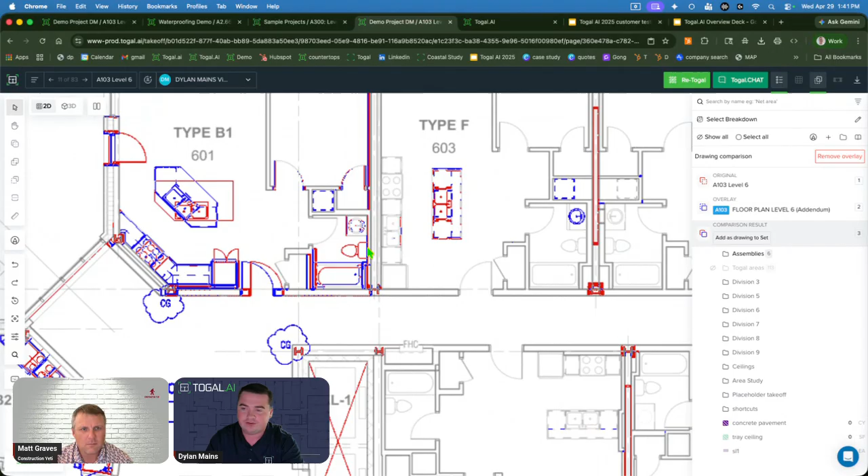With Togal, we actually auto align it, and we only highlight red and blue what changed. All the stuff that stayed the same just stays gray, red is dead, blue is new. You can press T on your keyboard to flip back and forth, and press O to go back into overlay. One of our recent updates lets you actually update your takeoff quantities right within the compare mode tool.

There you go. What other questions, guys? Anything else you want to see? Because the problem I always have with Bluebeam is you get two sheets, and the viewpoint or view in the drawings is slightly off, and you have to go realign them. Did you show that? Is that what you were showing?

If they weren't exactly aligned—we do auto align it, but if the two sheets are too far off, maybe the auto align doesn't work. So we still have the option where you could manually override it, but on most sheets it's going to auto align it for you.

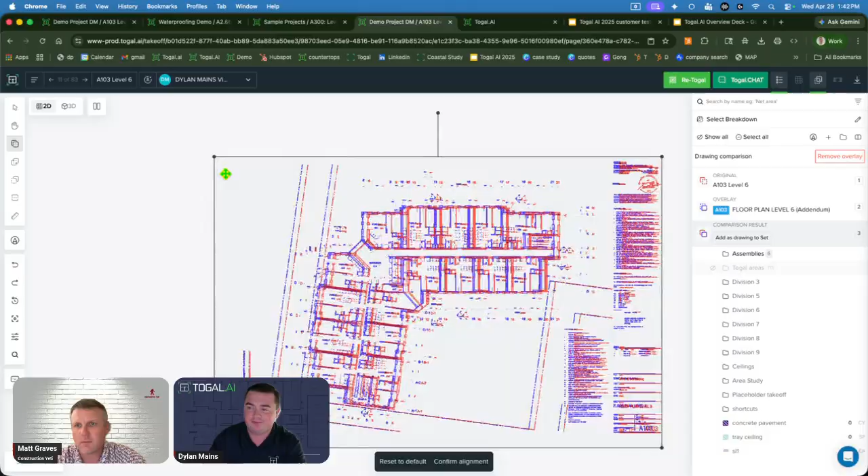Got you. Yeah, sorry, I was scrolling through comments, seeing what we missed. All good—we're getting comments from LinkedIn and YouTube, right? Yeah, I think we've got all of them. I don't think we've got any YouTube comments yet. Okay.

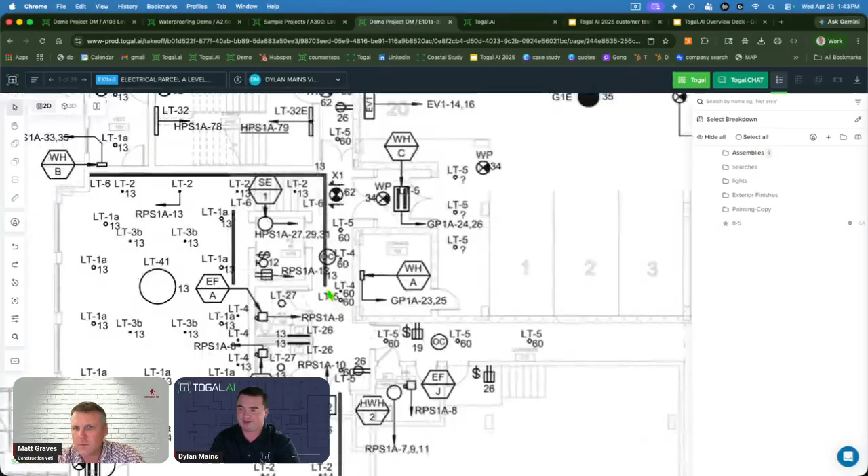The other thing I could do is count some light fixtures real quick. We've got time for that. So in this example here we've got lots of lights, and again you're playing Where's Waldo, clicking one by one. With Togal, we just type in LT5.

Repeating groups too, yeah we could show that. But once again, even with layering issues, it still gets it. We could count these 400 light fixtures really fast, just one click per page. That's done. Let's show repeating groups though.

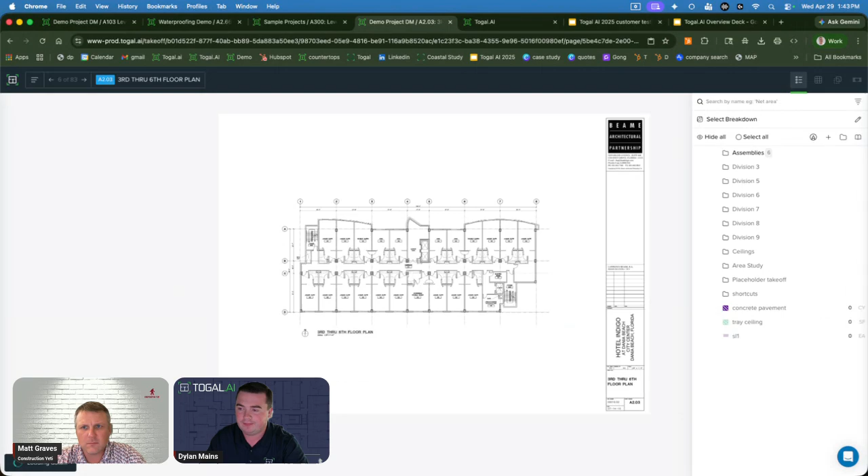This is a new feature that just came out a few weeks ago. Okay, I should really have a unit plan for this, but I'm just going to use this plan as an example, so keep that in mind. This should really be done on a unit plan, but I'm going to drag this off to the side and say this is my typical junior suite. I'm going to make this carpet and make these tile, for example, and erase off this shaft wall here. That's my typical junior suite. I'll right click and assign that to a repeating group called junior suite.

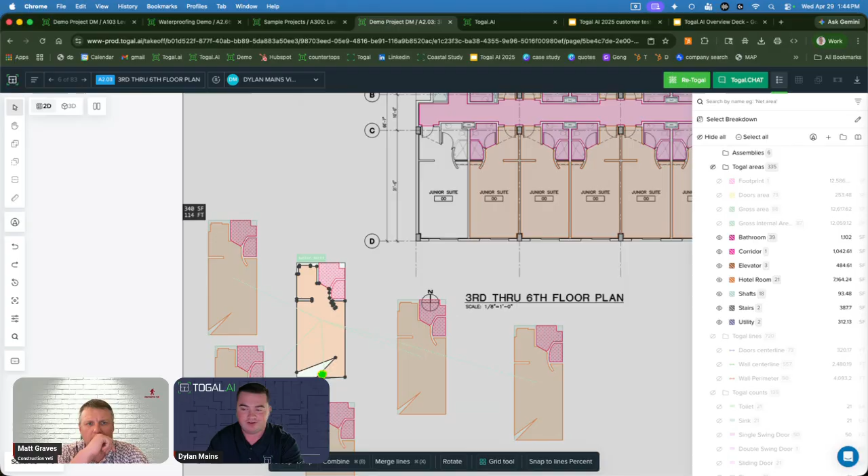And then I can start applying that on the overall plan if I wanted to. The big advantage here is all the updates I make on this parent one actually change it across the whole project. So I change this one to hardwood here, for example, they all update to hardwood across the whole project, but I've only got to update it in this one spot. I move a wall around or whatever, they all update in real time, which is crazy.

And where we took it to the next level is you can actually combine our text search functionality with the typical groups -- I'm sorry, we call it repeating groups, typical groups is what a different company calls it. But we'll search junior suite, and we're going to assign our Togal repeating group here in bulk. Just assign it and click convert, and all of them are done.

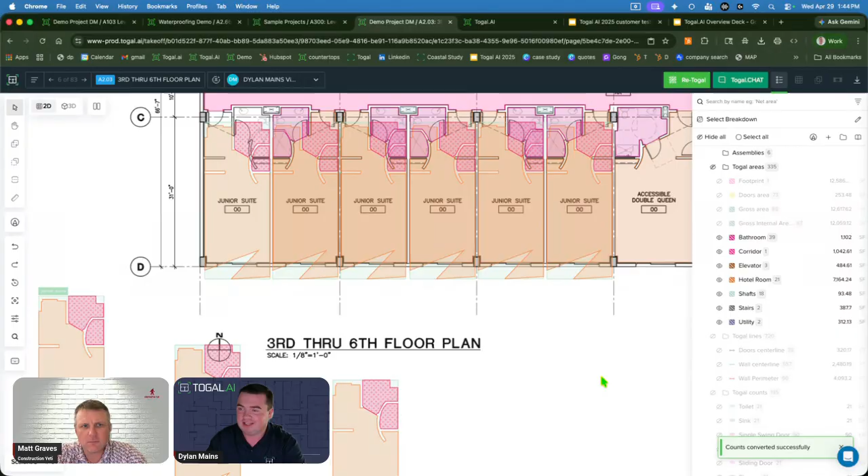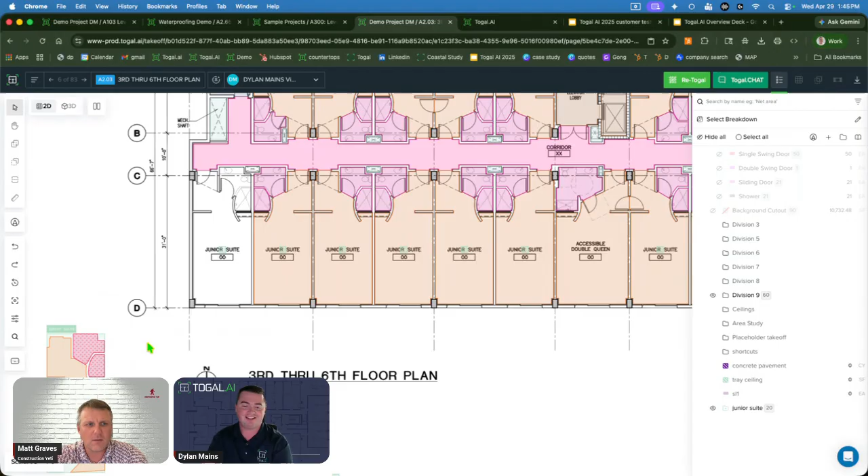And now say you don't want to sit here and line them up perfectly. What a lot of companies like to do is rather than showing the actual room, they just change it to use marker only, and it just shows like a square there, which means we've counted that unit. But yeah, that saves a lot of time, because as these architects change the plans up on you, you have to end up going in and changing every unit one by one. That can take forever, obviously. Until we just got to update it in that one spot. And there it is.

Yeah, we also offer -- I guess you could quickly do, well I guess you do it anyway. But I was gonna say you quickly change finish types and then. Exactly, yeah, just change whatever you want.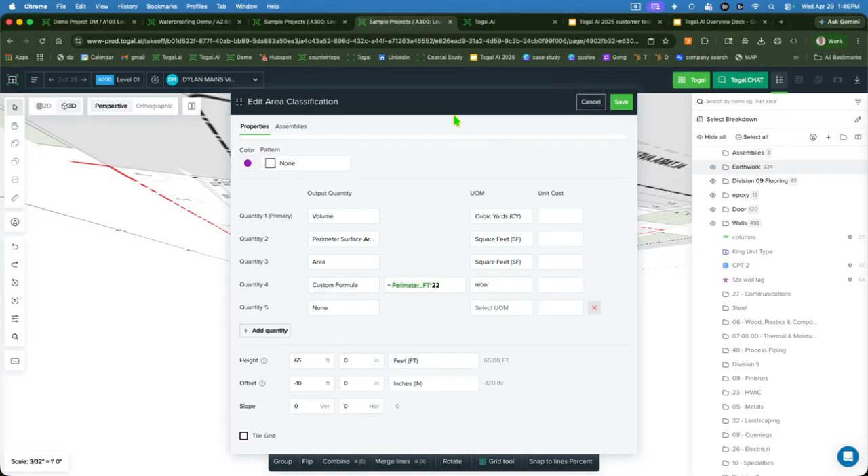So how do you get all that below grade? You can put an offset in here, a negative offset, and that's going to put it below the page. Oh okay, yeah, hopefully it's not down too low there. It took our heads off.

You can resize this window too, which is pretty cool. And you can also just click and drag it, and that's going to manually adjust the offset of that one item, which is pretty cool. You'll see there I can just click and drag, put it in space.

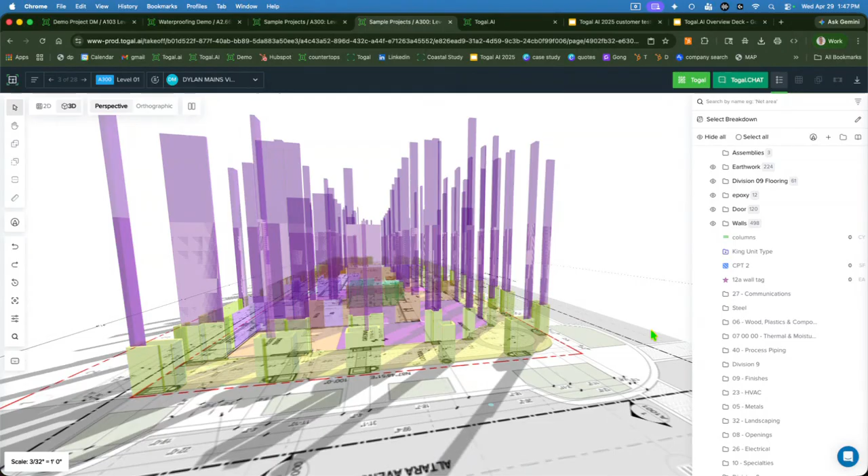Rather than have to type in the exact number, you can just kind of drag it where you want it. Or you can type in the exact number too by clicking edit here.

This may be a silly question, but obviously you've got that depth. Yep, if you're trying to do a takeoff of concrete, you can do volume as you're right there. Volume, surface, perimeter. It's kind of funky, we call it height but it really should be depth. Like if you're doing an area, let me do an area here, and I want to do a 4-inch concrete pavement, or a 4-inch concrete sidewalk, we'll say. I can get volume, obviously, get area.

So we can do up to 8 quantities. Most takeoff tools limit you to 3. We can do up to 8 here in Togal, and we can do custom formulas, that's the big selling point there. We've also got perimeter surface area. We can take the perimeter of a room and multiply it by the height and get the ceiling and the walls at the same time. That's a cool one for GCs to fly through takeoffs.

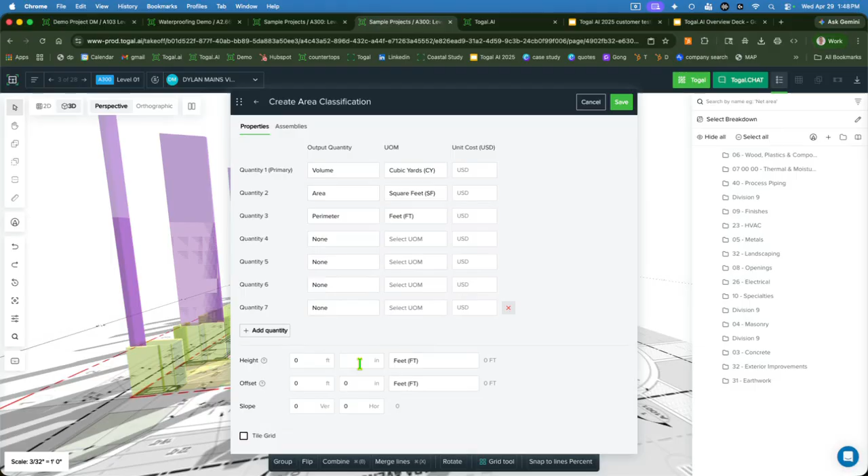And then you put your height here, which is like your depth, essentially, and you're good to go. Well, 4 inches is not going to show up very cool in 3D, but there you go.

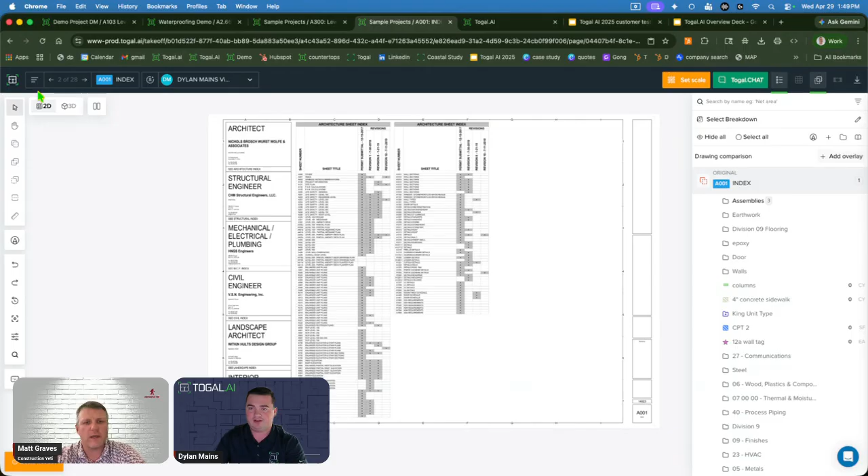I'm not talking about overlaying, I'm just talking about in your page you were just on where you're seeing all the drawings. Yeah, that one. Okay, no, you'd have to make a separate set here. I got you. Okay, like a set 2 and upload those there.

But that's also a nice thing. With most tools, you got to make a whole new project to upload that new revision, it gets complicated. So this left side here, you've got different sets. You can have your 90% CD drawings as its own set, for example.

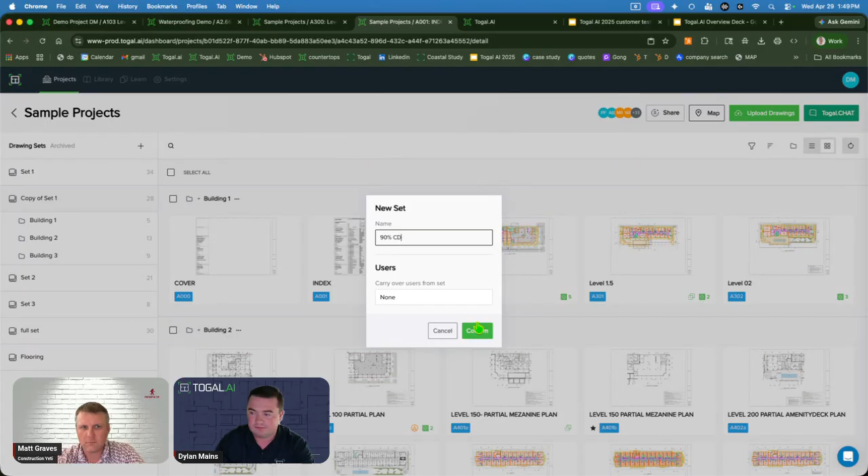Yep. Great questions.

Not a question, but a comment. Gregory says, great demos always. Nice, academic account for students. Yeah, free student accounts, by the way. So just a .edu email, we get you a free account.

Oh, that's cool. Something else that just came out recently is we have a new assemblies module. This is pretty cool, this kind of gets in the weeds a little bit, but for all the subs out there, you can add your studs, your top plate, your bottom plate, your insulation, and see it. You can visualize it in 3D too. You can see we love 3D stuff here at Togal.

But yeah, and you got these drop downs here, you put in your different properties of that wall. That's crazy, yeah, we can get how many boards you need, etc., as an output.

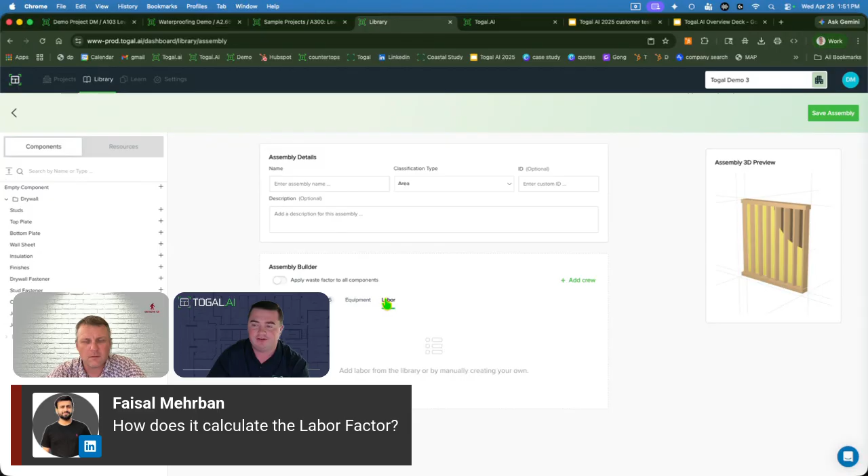And yeah, for this we have labor. I saw one of the questions asking about labor factor. Yeah, so here's where we can put labor, or we can do custom formulas for that too. If you remember, within the classification, you can do up to 8 outputs on every classification. So you can do unit cost, that's for your material. We can do a custom formula that equals my area in square foot times $1.25 per square foot for labor, maybe, or something, that may be way too low, I have no idea. Labor price per square foot will be my unit of measurement there.

And put in my pricing there. But yeah, this window here looks very similar to OST, so you should feel right at home here for most estimators. Looks pretty similar.

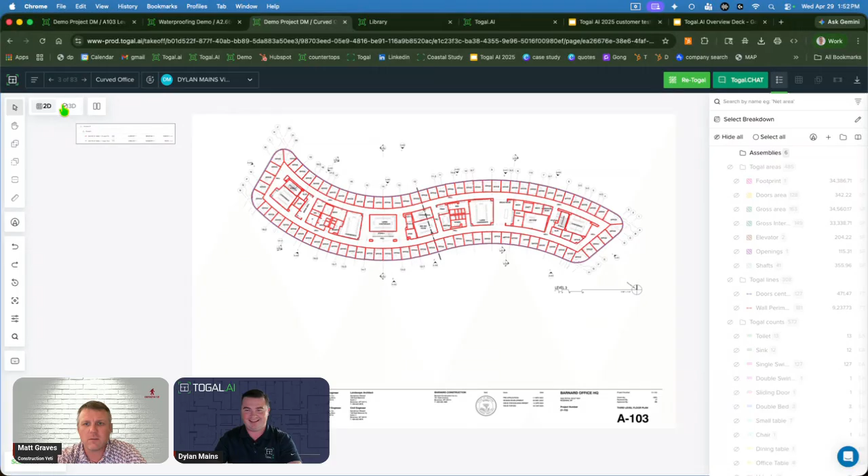And yeah, we're constantly updating the platform too. I think that's a big selling point here. If we go to help.togal.ai, we've got the announcements. You can kind of stay tuned with our releases. There's updates basically every week, with new stuff added in.

Do you have a public roadmap where people can see what's coming? Not a public one right now. That's also in the works, but you can hop on a call with us and we can talk through some stuff we have coming out.

Is there any secrets you can give us of anything that is in the works? The wall tags thing, that's actually not even been advertised yet. We just released it, and we're looking to get feedback on it. We haven't even announced that yet. So that just came out yesterday.

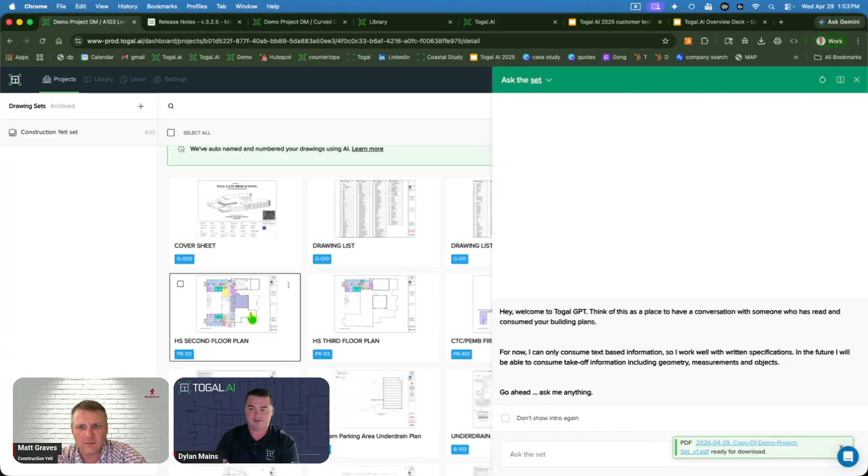In Togal Chat, there's actually some hidden features already live now, where say you want to rename these drawings. You saw the AI name the drawings for us. You can actually have Togal Chat name the drawings as well. So say you want to include the date of every sheet in your drawing log, because we can download a drawing log from Togal. You can have Togal Chat run the drawing renaming tool and include the date of each drawing in the sheet title.

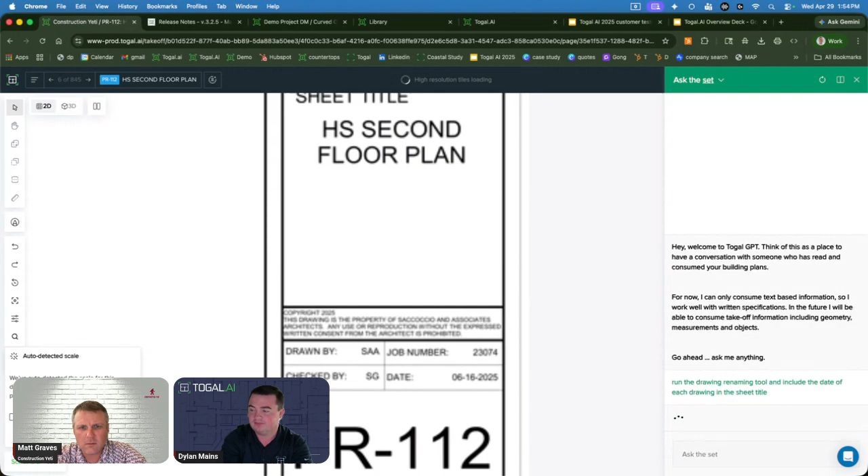And it'll just magically start updating the sheet title to include the date of every drawing. That's a pretty cool function.

Togal Chat can also convert things like your door schedules and finish schedules into an Excel table. That's a pretty cool feature not a lot of people know about, but lots of cool stuff Togal Chat can do.

Okay, you'll see it's already happening here. Everything's so fast, look at that. The dates are already kind of populating right before our eyes. That's pretty wild, I don't know any other takeoff tool that can do that.

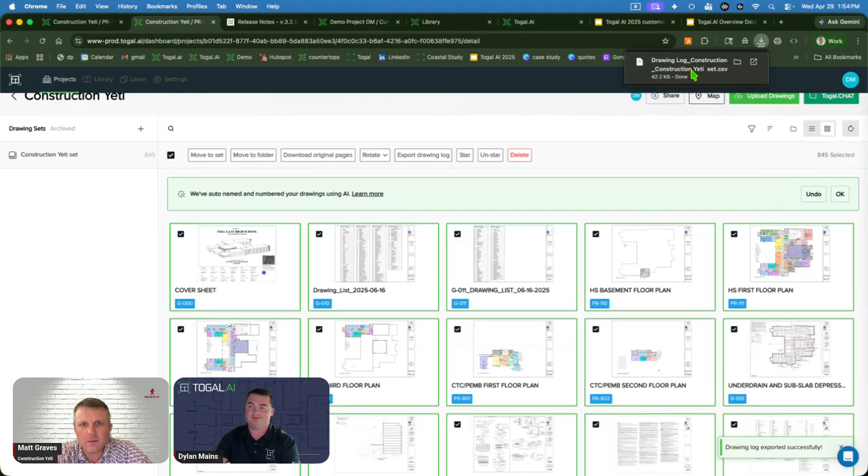And the drawing log thing, this is also a big one. Some companies have a person manually typing out these names in Excel to attach with your bid, to say in the contract, here's the sheets we bid the job off of. In Togal, it's as simple as clicking this export drawing log button here, and you've got yourself a full drawing log with every sheet listed out.

All those dates aren't populated yet, but that's coming soon. It's working on it right now.

What's the craziest thing you've seen people do in Togal Chat? I had somebody upload their entire contract. That was really cool, and it calculated liquidated damages. That was a wild one. They said things like we're 3 days late on the retail, we're 5 days late on the office space. It had all these different ranges for liquidated damages, and it did all the math for it.

I've also seen some of our door contractors do some crazy stuff with Togal Chat, like having it do math, which is kind of on the cutting edge of what it can do. Having it figure out how many of a certain type of door there is, then looking at the hardware schedule to figure out how much hardware, each different hardware type you need. That can be a pretty grueling process. How many hinges do you need? How many door jambs, etc.

I think you're underselling Togal Chat, it's a huge feature. Yeah, it's a huge feature. I'm just thinking through it - it's almost like I've been playing a lot with Claude Cowork, and it feels like Claude Cowork that's basically got access to your whole drawing set. That's what it is, but it's all built in, and it comes with training. That's the other thing, Claude Cowork doesn't come with training. A lot of you guys are like, I hear about Claude, but I don't know how to use it.

Like sign up for Togal, unlimited training, it's great. Can you upload specs? The specs as well, yep. So you can control where it pulls the answer from too. If you want to upload your specs, you create a new set called specs, upload your specs there, and you'll see Togal Chat updates based on which one you're in. You can also ask the project, which means it'll pull from the plans and specs. And ask the drawing, like that use case I talked about before with a door schedule - you pull up a door schedule and say make this into an Excel table, and it can do it. Lots more updates to come on that.

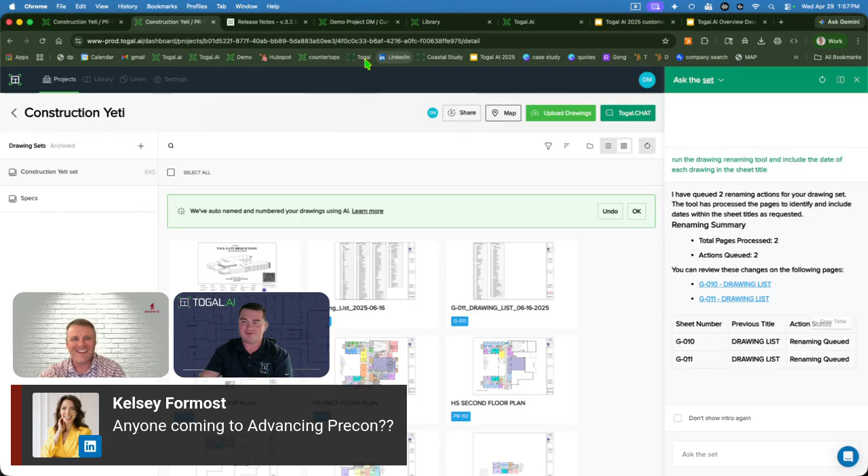So Kelsey and I did mess that up. Anybody going to Advancing Precon? We talked about this earlier, but if you showed up late, you're doing a NASCAR race. We'll have laptops there with Bluebeam plans and the OST loaded up, and if you beat us in a race on a takeoff, you win $1,000. I'm sure a lot of you are really good at your current takeoff tool, so show up to the booth, you might win $1,000. We'll see.

Are y'all going to be filming that and releasing those clips? I hope so, hopefully so. That's up to Kelsey there. I guess you guys are going to ENR Future Tech as well. Yeah, that's a big one too. Same week, it's kind of wild. Our two biggest conferences are in the same week. Yeah, I guess the conference folks didn't coordinate.

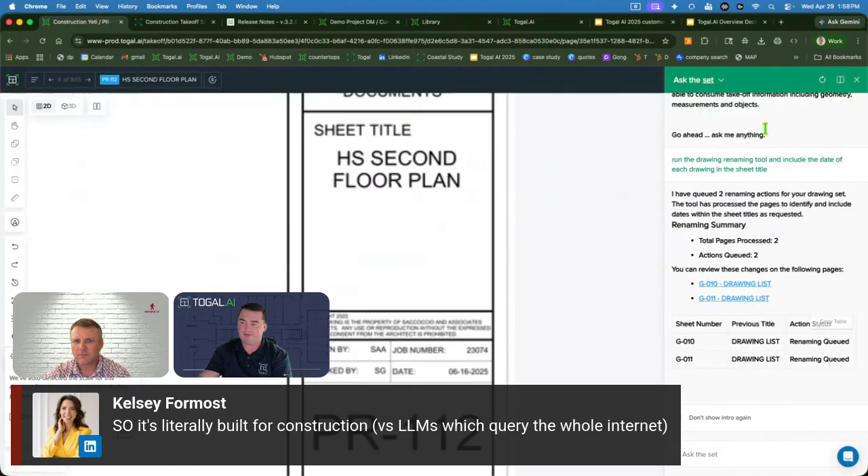Kelsey added a couple more comments here, worth noting Togal is trained only on construction documents. Yep, so it's literally built for construction versus LLMs, which go off the whole internet. That's the Togal Chat, which helps with hallucinations, right? It's not going and pulling from God knows where. Exactly, and it also always provides a hyperlink for where it found the information too. That's a huge selling point. So it's not going to lie to you, is the idea.

Let's keep the website pulled up here. We got a real question actually. On the interior design drawing, when they tag each wall with a different finish, like Paint 1 or WC03, will it split up that takeoff automatically?

Yeah, Togal's going to measure all those walls for you. You'll have to put in the heights and stuff like that, but it's going to measure all those walls for you and make it super easy. That's the easiest use case. If you see a lot of our big logos here, Paint's one of our best trades. All the top painters in the country likely are already using Togal, if you know a painter you could ask them. Yeah, that's one of our easiest use cases there.